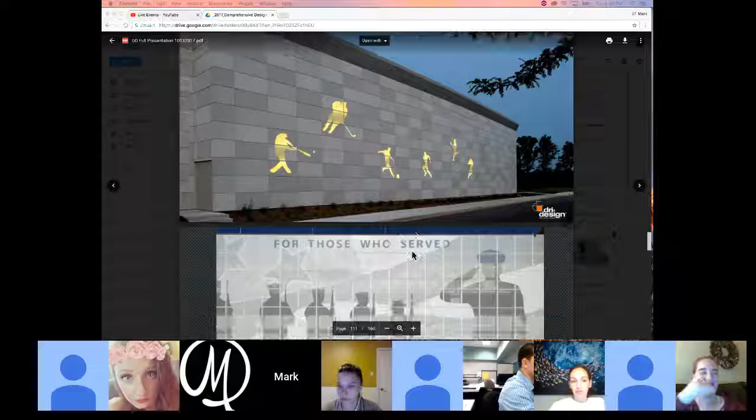All done with metal panel, all done within the sort of purview of finishes, paint, perforations, and product type for, again, a parking deck. Backlit, perforated, obviously, on a building that maybe is clunky in size and scale, like an athletic facility. This is one way of making it more palatable, or something that maybe wants to commemorate those that served. We just celebrated, of course, Veterans Day, so this is a very timely example.

Embossed, again, low relief, bas relief. So here's kind of a dimple pattern or pimple pattern, not only for interior but exterior applications. These almost look like flooring tiles or stair treads. So this is a textural example.

If you live in Oakland County, or if you ever drive through it, there's a brand new building for the Audi dealership. They've been rebranded. All of their stores look like this. If you walk up to the one in Birmingham that Bob Ziegelman was the architect for, who I just saw the other day, this is what that metal panel looks like. And here's a sort of a larger example of the Audi dealership's new appearance. And another close-up of that.

And then I won't name the Atlanta beverage company whose color is part of its brand because I'm not supposed to tell you who it is, but you know, you can actually allow the perforations to be part of the brand. And that's all I got for you. I'll just sort of show you more examples of how the metal panel has been approached with these sort of case studies.

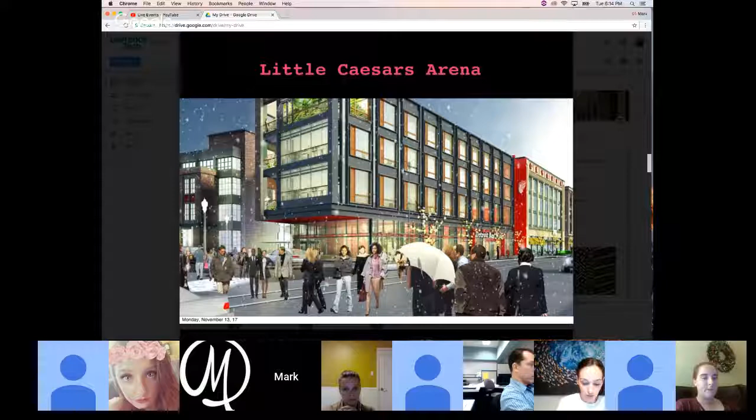Many of you know that we've worked with HOK on the arena, so these are some of our early design sketches for building A and B. Building A and B are braided together, and they sit right upon Woodward Avenue. This is where, if you've been there, Kid Rock's restaurant is, and the building to the left in this image is building C, and that is going to be a speculative office building. So these were the original Lumion renderings. This, of course, is the build out of the arena.

So the arena is this big ass building. It sits on a super block, so it takes up an entire city block, but it tries to break the building's expression into discrete vertical conditions, of which there are 11. So there are 11 different brick masonry products operating pretty coherently. Here is an example of all of that under construction. The building in the foreground is Building C. The main entrance, the Comerica entrance off of Woodward, which you're seeing on the right here, is right here. And then Building AB is this condition here.

So the shot you just saw was to the lower right of this image, and this is obviously south. And this facade is going to have other architecture next to it. This is a more impervious facade, but even that impervious facade is broken into 3 distinct conditions: the condition in the middle that reveals the wrap of the ETFE roof of the bowl, and it reveals a mass towards the street, which wraps some of the fenestration from Woodward onto Sproat Street, and then the more mechanical industrial facade to the right along Cass.

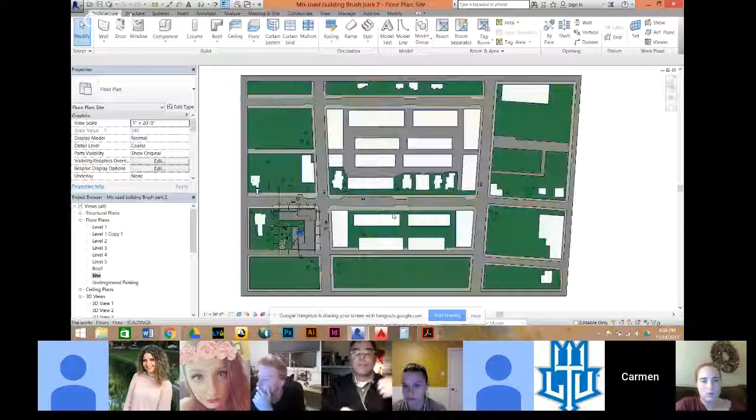That's fine, and I'm sad that you weren't able to use the effort by Michael. So maybe talk to him about that. But I think that's the way I would have approached it. Just like, oh shoot, I got to figure out another way to do it, right? That's how you have to act in an office. There's always 2 or 3 ways of doing the same thing. Do the way that's easiest and quickest for you. So that was excellent. And I'm delighted to see City Modern in the site plan. You all need to have City Modern in the site plan.

So you just answered it. Should I be putting City Modern in there, or should I be putting what's in Michael's model, the existing? Plus City Modern. Okay. All right, so I'll just keep it as it is. I think the program brief says that, actually. Okay, all right. So that was my question. I modified the underground parking.

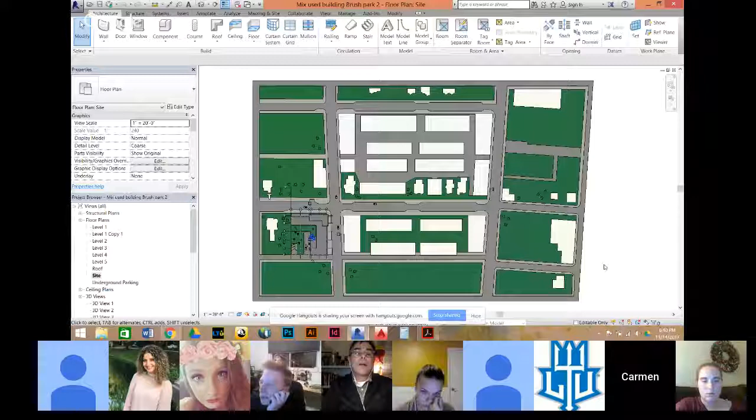Now, let's go back to the site plan. I don't know where that drawing is in its evolution. I don't know if it's finished, for example. But it is not. No. Yeah, okay. So right now, I can't tell where your site is. So you need to recalibrate the graphic sensibility so that your site is the most prominent figure. Okay.

Or element in the drawing, and everything else, including City Modern, is much quieter, right? It's like a figure ground drawing right now. So City Modern as a development is no different than the existing houses and apartment buildings next to you. So maybe look at examples of site plans online in the Blackboard folder. Look at how existing and proposed conditions were illustrated.

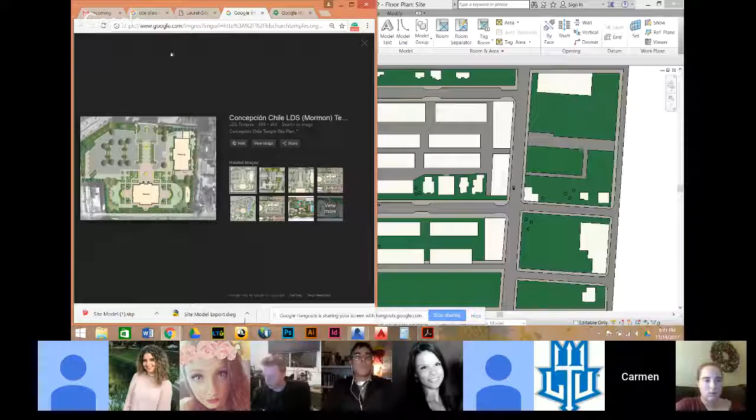I found a couple that I liked. For example, this was one. This would really be my goal, to have it like something like this or like that. Yep, I agree. I have a lot of work to do. Like something like that where it says the City Modern, A5, A3, and then the streets. So it's just a little bit. You don't have to label the building names of City Modern unless you're labeling everything on the site plan.

Basically, I think the premise of this studio is it says Hamilton Anderson was not hired. You've designed Carmen, but everything else and everyone else that designed City Modern did their work, and it sits exactly where you showed it. Okay. All right.

I also wanted to show you the underground parking. So I added my second set of stairs, rearranged the entire lower level, moved over the underground ramp. Your speed ramp changed. Yeah. So now I can fit 46 down below. Okay, so this is good. Let me just stop you right now at column line F, right? So you don't have a space there.

So you're going to want to protect that column with paint, right? Or a guardrail. You know what I'm saying? So you need to figure out a way to protect that thing, because it's the only one I think that's out in the middle of nowhere. Can you zoom in on that area? I want to look at space 12. I think space 12 can be a perpendicular space, not an angled space.

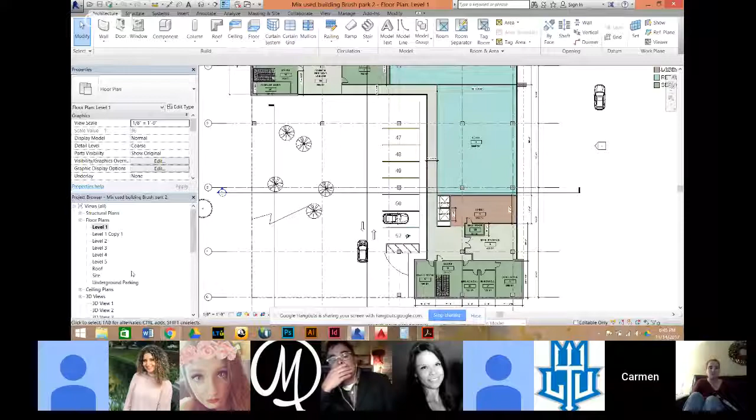So go back to the ground floor and zoom out so I can see the column bubbles. Back to the ground floor. Yeah, so you may have to rework that parking. And if you only need 4, you could maybe introduce them off the alley. Okay, off the alley. Perfect.

Now, let's go back downstairs for a second, to the basement floor. This is the basement. So that speed ramp is going to rise vertically as it moves towards the alley, right? So part of that ramp sits on the ground. As it runs vertically, it starts to create headroom underneath it so that you can actually drive under it, right? So there's going to be a moment when,

first of all, you want to show the dashed line work of the ramp moving up overhead. Anything in a floor plan that has dashed lines is indicating overhead ceiling conditions. So you're going to want to recognize that with respect to the ramp. Also, the squiggly line is what I'm talking about now in that area. So there's going to be kind of a square bulkhead that the speed ramp sits on. You should indicate that and then show, I should just draw this for you, but

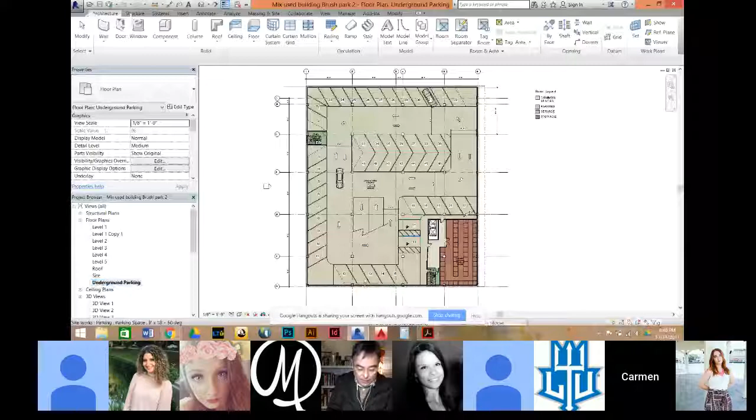And that parking space I'm talking about, go back to your ground floor plan, your basement plan. Screen share your basement plan. Yeah, you've got this. What I'm saying is do this. Right next to. There you go. And then you've got the column here.

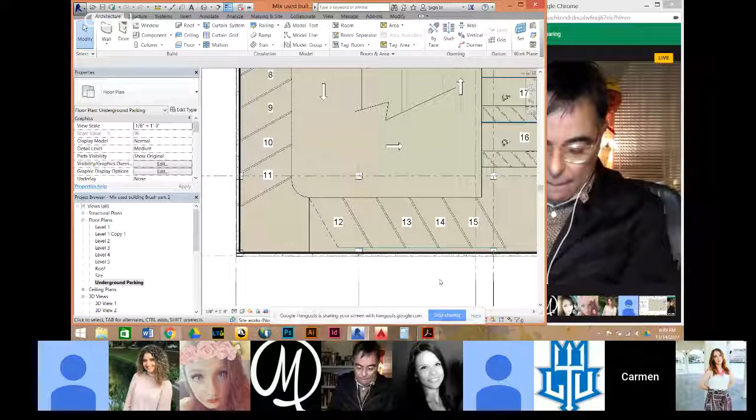It's kind of sloppy, I apologize. It's got a couple of things going on in it. But do this. There's your column. I see. Okay. Got it. And that's the curb or the paint stripe, Carmen, that protects the column. Okay. All right? Yep. Bueno. What else?

I think your presentation was perfect with what I needed for today. I printed out just a couple images of materials. Oh, that's nice. Can you hold that still for a second? Yeah. It was a little bit more traditional. That's a beautiful building. Where is that, New York? I'd have to go back and double check. I just kind of copied and pasted.

Then there was this type of material right there. Uh-huh. It was all metal. So I was just taking a look at windows. I'm gonna finalize by Tuesday, the windows with the metal. Yeah, that's a nice building. I know that building. So I think they were very sophisticated with the colors that they use, plus the metal. I like the window dimensions. So that's what I'm pulling together. The presentation was very helpful with the colors, the redesign, all of those. So I want to see what I can do with it.

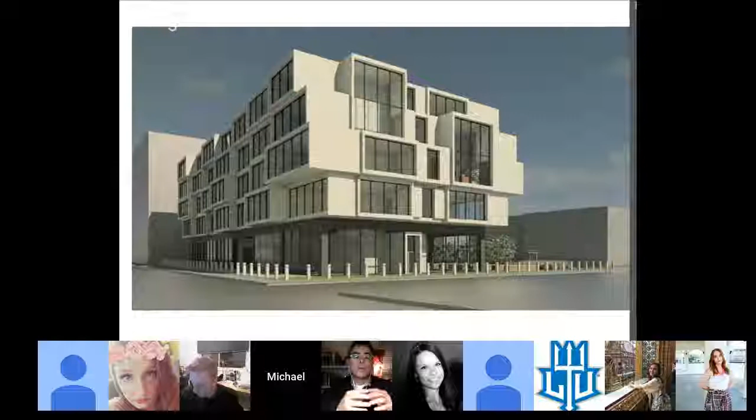Oh, you have like 2 computers up. How do you do that? I just opened the link on my personal laptop. Ah, brilliant.

So I fixed up the facade a lot. This entire part facing Alfred, I added windows. I also added these 2-story bay areas. I love those. Yeah, so a few of the apartments now are going to be 2-story lofts. So they'll be smaller in footprint, but there will be a footprint on 2 floors.

I think the window units are... I don't think there's enough mullions. Boy, okay. In all of them. So in like the second floor. Well, let me be very careful to say this because I love the amount of transparency in that unit. I want to make sure you understand that, right? So I love the quantity of area.

I don't mind the number of vertical mullions, but I think you're going to need horizontal mullions like 2 feet up from the slab to do 2 things, Michael. One, to break that vertical height of glass into something more reasonable, right? From an installation and from a cost perspective. Not that cost is a driver, but more importantly, from the perspective of the necessity to provide fresh air into these units by virtue of kind of an operable awning window, right? That you can crank open.

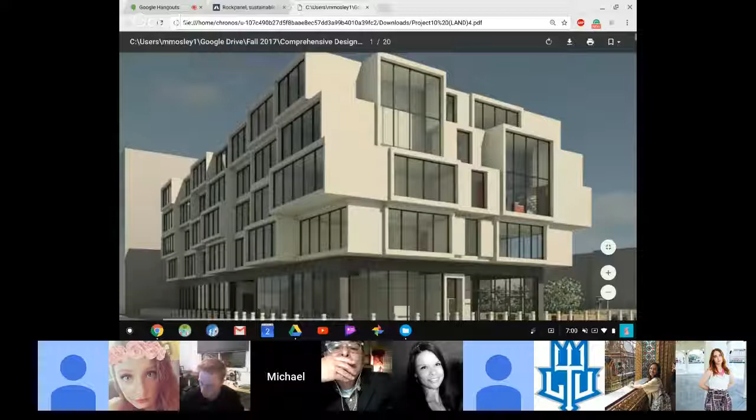I was looking at a few materials. This is Rockpanel, which is very similar to what you designed, or presented. Yeah. But made out of rock. So something like this or your metal cladding could work on the outside. And then I could choose a white and black one if I wanted, or just something to differentiate.

So if this building is actually a panelized thing, like a cementitious panel, a metal panel, or whatever, then there's a whole other conversation, right, about jointing. If it's poured in place concrete, then there's only joints that are relative to the concrete. So that's something you want to talk to Ash about. But there is something kind of compelling about the sense of mass and weight that the all white gives you.

So if you go with a panel system like fiber cement or metal panel, I would suggest that you try to create an effect with very few joints or minimal joints in terms of width and height, so that you create a more uniform aesthetic. Because there's something really powerful about this thing as a thing that's all white or is all black.

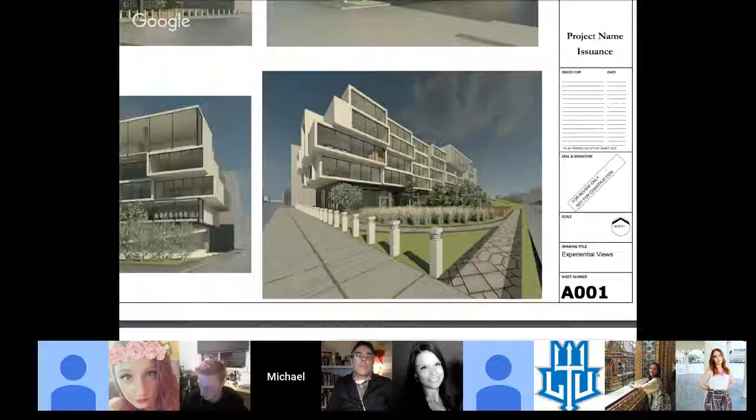Yeah, so the park layout isn't finalized by any means. It's something I just started working on, but it definitely helps to see what's in it. A lot of trees. The ramp here, I extended it all the way up, go to the site plan. So it can be like a green roof going up here. Shadows are messed up, but

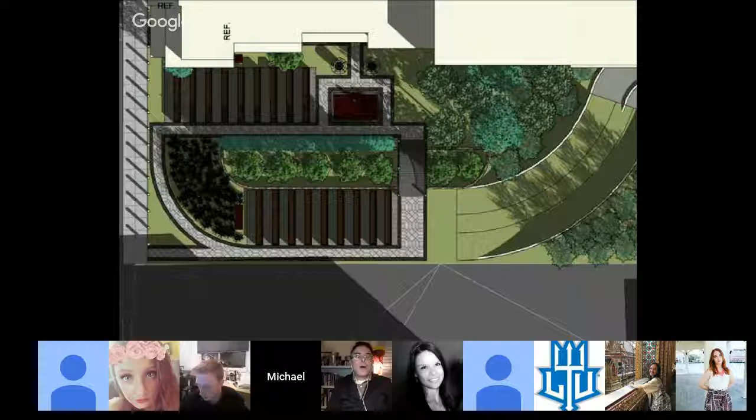here in this area and this area are just planters. I thought those could be operated or owned by the residents. This right here, it's just a Zen garden. It's peaceful, but I also had way too big of a footprint for the retail space.

Let's go there. So what I did, yeah, it keeps lagging. Yeah, I noticed that. Zoom out and then maybe zoom in. Can you just pan? Let me try and reopen it. Right here, well, this shows it. So since those two retail spaces were so big, right, I'm still not seeing it. I still have your logo. Oh. Did you screen share it? And I'm gonna rejoin. There we go. Oh, just went away.

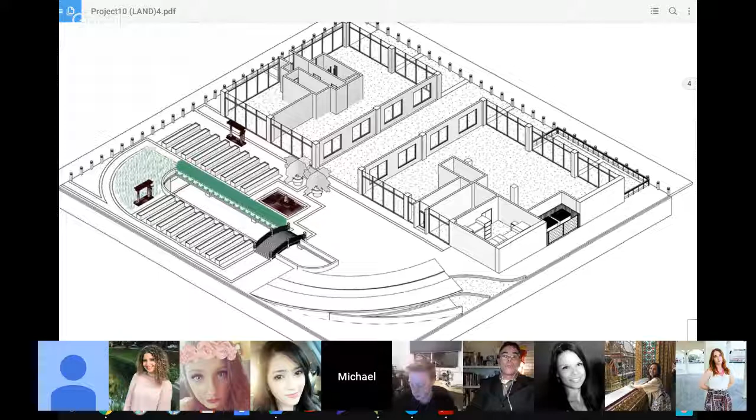These windows that I just put in here could be replaced with like a rolling glass panel. And so say if this wasn't a regular retail, say if it did end up being like a community harvest type thing, or even just an event space, it can open up into this. And so it gains a larger footprint. And then one of these could be like a NanaWall or something, and then you get all of that exterior.

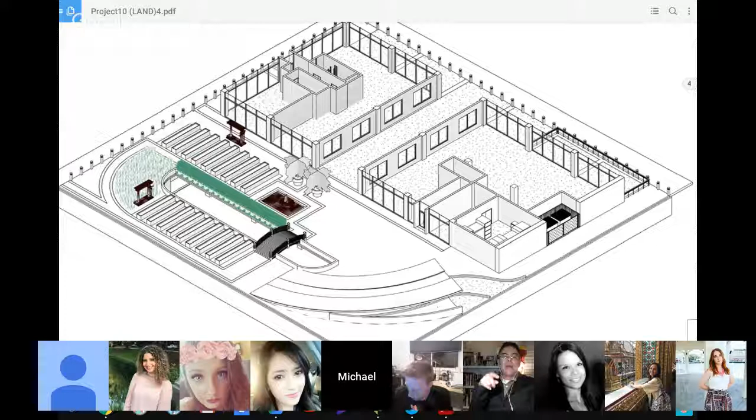In the area, Michael, where you've got that little Chinese bridge, that footbridge, is that spanning over an opening that looks into the parking level below? Yes. Okay, so like in the conversation I had with Carmen a minute ago, where you show on the plan items above that are relevant, like overhead conditions, as dashed line work, you're going to want to show that incision and the bridge as dashed line work on that parking plan. Okay. Capiche? Yeah, this was my plan for it.

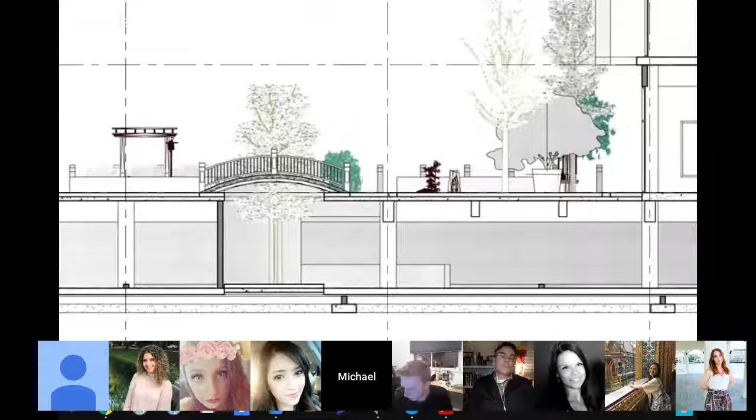Yeah, there's a lot of graphical standards that my drawings, especially these sections, need to be bumped up to. So here's what I want to say about that. Based on the way you're trending in our studio, the progress I've seen tonight, and the quality of the decisions you're making that are leading to the design you have for us tonight, if you continue to press the way you have been, you're going to make it. Cool. It's good to hear.

But you haven't had the section and the conversation with Ash completely resolved yet, so I'm freaking out. I'm freaking out because you're getting closer to nailing this thing, and I want you to nail this thing. But if you don't work out that wall section, it's going to be a huge hit on all of the hard work you've been exerting. And I'm noticing this since Benchmark 2. I'm wildly excited about how far you've come, but I'm still freaking out. I'm just trying to be honest and encouraging. Is that translating? Yeah, completely.

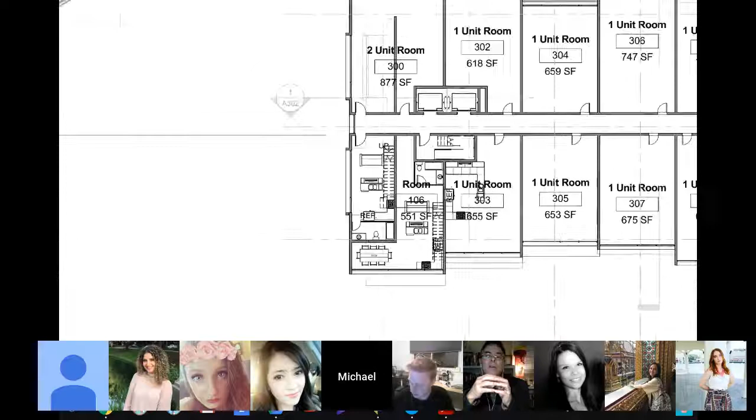That was most of the big changes. I did do one little layout here for the rooms. Yeah, let's look at those because I haven't seen them smart sized yet. So what's this interlocking L thing? Is this all kitchen? That kitchen's big. Oh, that was just the kitchen family I was working off of. You need like a sleeping room, a bathroom, and a kitchen. These two are 650 units, the only ones I've been working on, and these are the smaller lofts, so everything's a lot more open. The kitchen is right there.

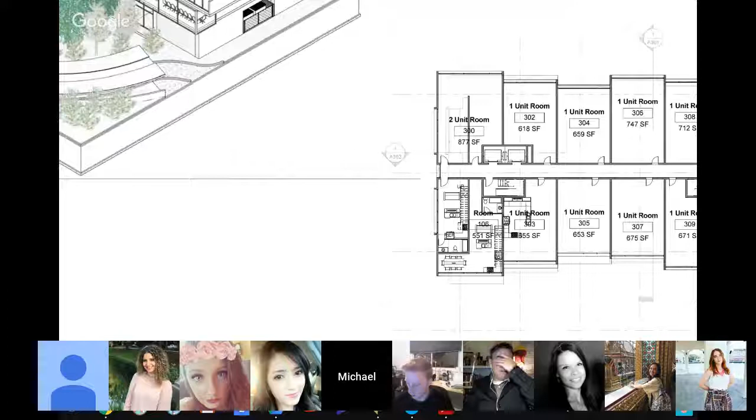So in the 551, where am I sleeping? You go up these stairs, because this is the 2-story, and then your bed's right there. Never mind, let's go back downstairs. Can I look at a 600 square foot unit and your idea for that? I have not worked out any of those units yet. Okay, a lot of your classmates, if you go into their folders, have looked at this, and you could learn a lot about how straightforward they are. While they are fun to work out, they have to be worked out, right? Can you go back to your plan there for a second?

Like 304 is not the same thing as 306. Right. Not the same thing as 308. Each one is different. So try maybe to think of, remember the Cleveland project that I showed you with Stanley Saitowitz with Natoma Architects, right? So they color coded like a green swath, a ribbon along the corridor wall that graphically kind of indicated the infrastructure for each unit.

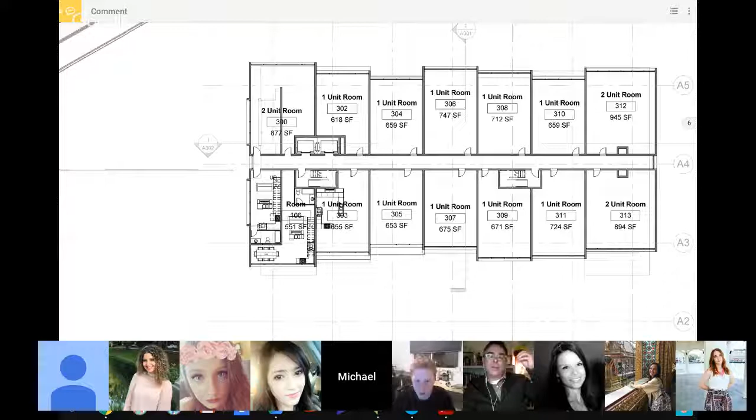You know, bathrooms, kitchens, closets, that kind of stuff. What was not colored green was like bedrooms and living rooms. So think of organizing that stuff in these small units in a rigorous, simple way. So let that be the constant that works on all of these units, and then let the variable be the sleeping room / living room.

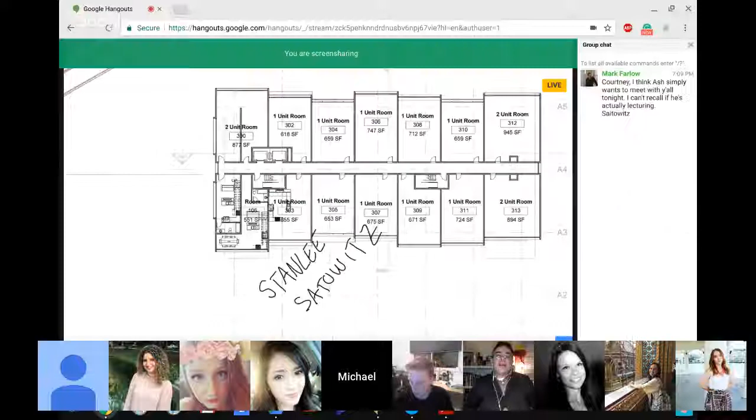Yeah, so it's the, yep. Go to images. Oh yeah, there's this one. Remember this one? Yeah. So click on this project and get into the drawings, or scroll down. Maybe there's an ArchDaily. I showed you all these drawings. It was in ArchDaily. I know that because I grabbed those images. Keep going.

That drawing. This one. See that? Services, kitchen, storage. Those are your units. Okay. Right? So green indicates services, right? And then the variables, like look at the variables, right? Living room, bedroom. Good stuff. But the same rigor that he went through is what you have to go through.

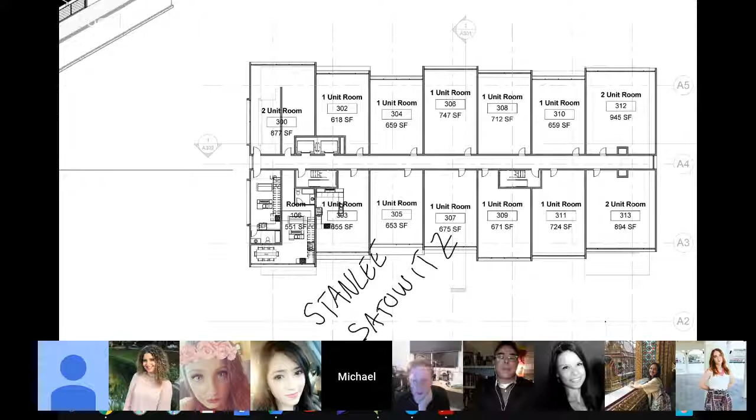I think Tracy and I are going to go there over the Christmas break because I want to see this bad. Yeah. And I want to have my own experiences of it for the next time I talk about it. Can we move on? Yeah. Cool. Keep going, Michael. You're almost there. Thanks. This was informative. Thanks.

Okay, let's see. Eric. Do I still have Eric here? Eric, are you there? Yeah, I'm here. Do we have anything to freak out about? Nope. I think I'm in good shape. I would too.

I do think that for your project, the thing I'd like to see you really explore is the skin of the building and the way that you approach that. I'm not necessarily talking about doing the large elevation drawing, but maybe the lecture tonight looking at metal panel, maybe looking at brick, will help you think of it not as just one consistent skin that's wrapping around it, but maybe breaking it into more discrete moments. I don't know if that's going to work for you, but I think it's worth looking at.

And I'm trying to encourage you to do that, and then I can look at that with you. But you got to want to do that. I'm not telling you to do it, but if you do it, I'll look at it. Okay. Yeah, I'm actually getting to the point where I'm going to start tackling that pretty soon. So maybe even by the end of the night, I'll have something. I can shoot you an email on it. You know, I'll look at it.

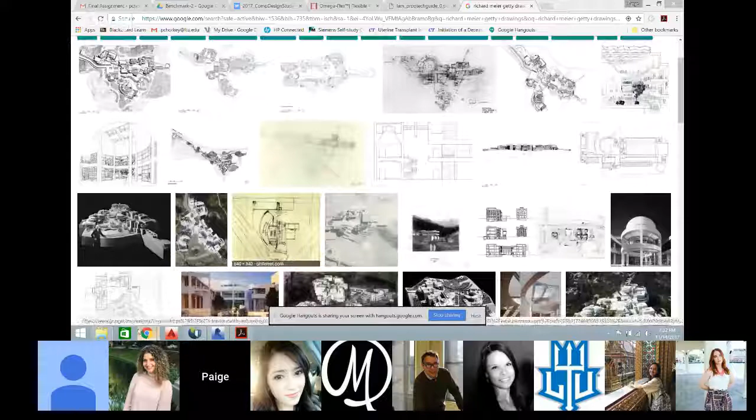Okay, go to the top row. This one? And look at the elevation sketches. Third one from the right. Yep, this one. Look at those drawings. Actually, that's the Frankfurt Museum. That is the Kunsthandwerk Museum in Frankfurt, Germany. Right? Yeah, it is. Although it says Getty, but this is Frankfurt. Yeah.

But scroll down, let's look at some more. Okay, the second image. Go back up. This one? That second image with the pool. Let's go to that and then go to the article. Let's go to the visit. Okay, let's scroll down. These archdaily.com articles generally load up the project with drawings and things like that. Close. Scroll down.

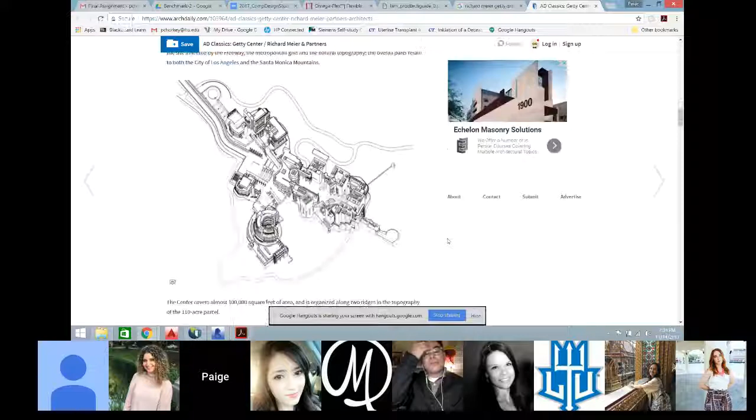There's an image. Materials. Yeah. Look at the materials, just like what we were talking about tonight. Oh. Mm-hmm. I'm not so interested in the interiors. Okay, click on that. This one? Yep. So, these are amazing, right? This is not as big as your building, obviously. Why does it keep popping up? I don't know.

So here's the thing. I want you to take a little bit longer look at Richard Meier tonight, and look at his work, look at his drawings, look at his elevations, and begin to ask yourself, why did I bring his name up for your project tonight? And I think if you kind of think about it, it's going to be pretty easy to understand why.

The gridded pattern on the metal panel that you're going with here is comparable to his square grid pattern. The window proportions and the window heights and the window varieties that you've got are comparable to what he's got. The idea of incised balconies, of colonnades and pergolas on the roof, the complex massing, right, is part of not only his vocabulary, Paige, but also...

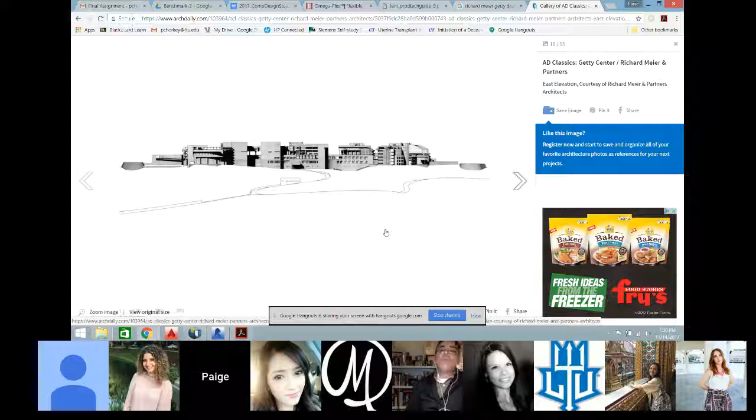This is 1927. So Paige, all of these guys, Richard Meier, Charles Gwathmey, Michael Graves, Peter Eisenman, even John Hejduk, along with a whole bunch of other people after them, looked at this guy really, really carefully. They tore it apart and tried to make their own work better than him. He was kind of like a god to them. And they tried to kill him, in an Oedipal way, right? Kill the father to be the better father. So they tried to best him at his own game.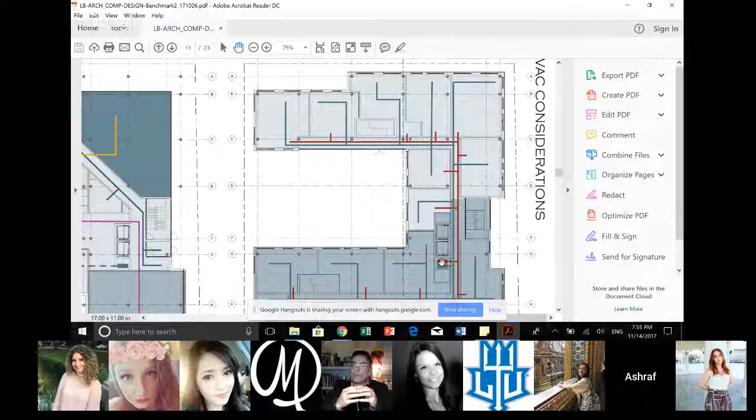She does have the return and the supply right here. That's the supply, and the return is the shorter one. This is a very good foundation, and she did have the return duct and the supply duct. I would expect that she and others as well start laying the supply grills in her rooms, and start to find the shortest path for this duct.

For example, Lynn, are you here? Yes, I'm here. Okay, thank you.

Usually the duct here has to have like a dead end. This way, with this supply duct, most of the air will go in this route. It will not bend to this path here. Why? Because aerodynamics 101, the air will find the shortest path or the easiest path. And to make a turn of 90 degrees is very hard for the air. So the air is going to just go all into this unit.

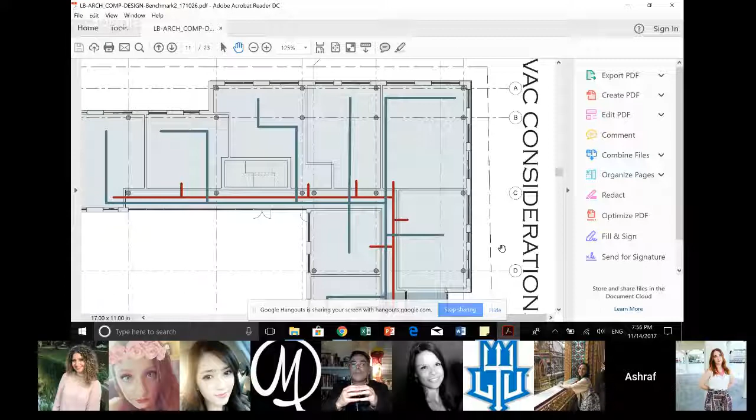So you have to have a sort of dead end here, and then this duct comes with a sort of bend to enter this unit. Another thing here, these share the same line. These should be a little bit staggered. They don't line up this way. So that's a quick comment, but it doesn't negate the very good job that you have done.

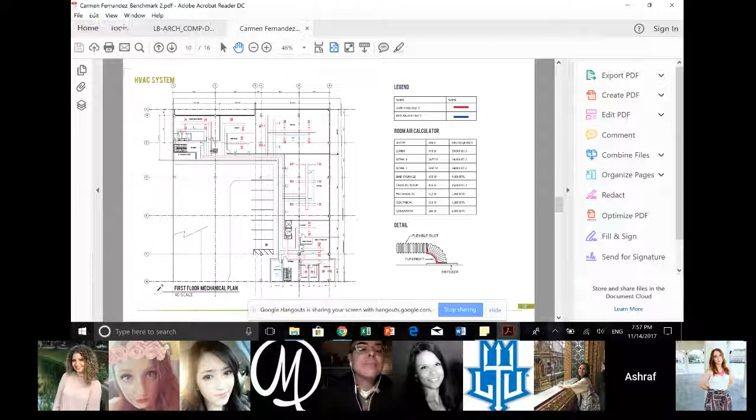I'll show you Carmen's. She has gone the extra mile in this benchmark, and I want everybody to start thinking her way and trying to finalize this floor plan. Here's Carmen. This is more advanced. I'm not saying it's perfect, but at least she started to lay out her supply and return grills. It could have been better, but at least she lined them up straight, meaning that her grid system in the ceiling is well thought of.

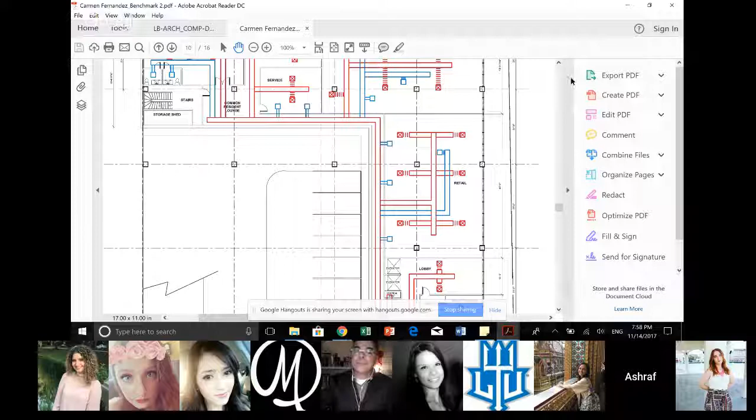I would love to see a grid for the ceiling. This is how the mechanical engineer and electrical engineer guys start these things. I didn't want to increase the deliverables, but usually they start with a reflected ceiling by the architect to lay out the supply and return grills. In this space, this is not bad. The exercise room and all the other entrances.

They start to look at the reflected ceiling plan and start from there. Try to connect these dots together, looking at the reflected ceiling. This is their start point to execute your dreams. You are the boss, like Mark at Hamilton Anderson. You are the boss. You lead these people to do what's in your mind, what your dreams are.

By the way, Carmen, are you here? Carmen? I can't see anybody. I'm just concentrating on this one.

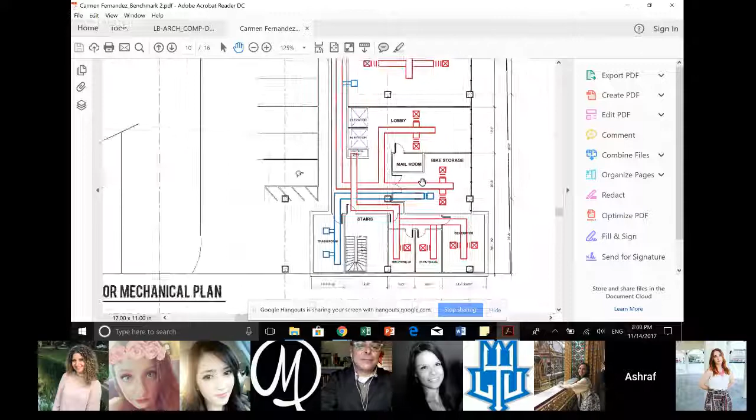This has a very bad relationship with the columns. These quirks will be fixed in the final. So again, that's a very simple supply return floor plan, and I'm really proud of this work. Again, it needs some refinement. I can't reveal more than that in front of others, but this is close to what I mean by a mechanical floor plan. So that's regarding the mechanical.

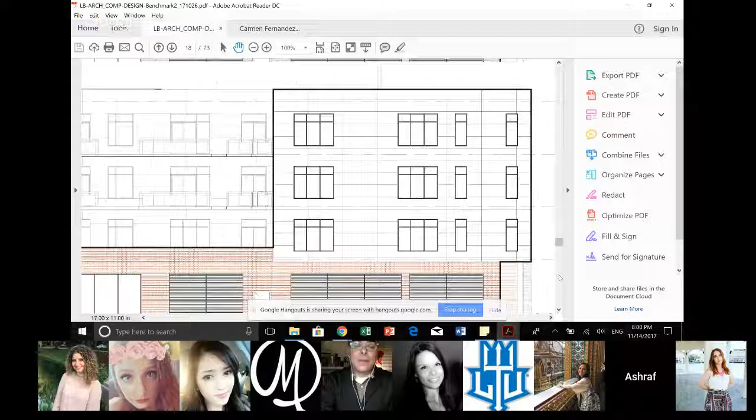Enclosure, this is why I brought Lynn's here. Enclosure, this is what I'm expecting. I'll show you other examples very quick, just a second here to finalize Lynn's. Where is the, I'm sorry. I'm looking for the wall sections here.

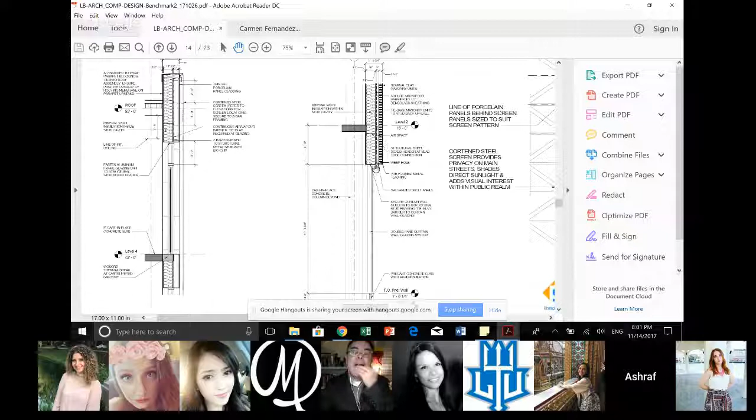Here. These are, again, good for this step. Very, very good. Very annotated, very precise, line weighted, leveled wall section. Let me see here what I'm looking for. The relationship, yes, she did it here. The relationship, how her skin is tied with the structural elements here. How your muscles are connected to your bones.

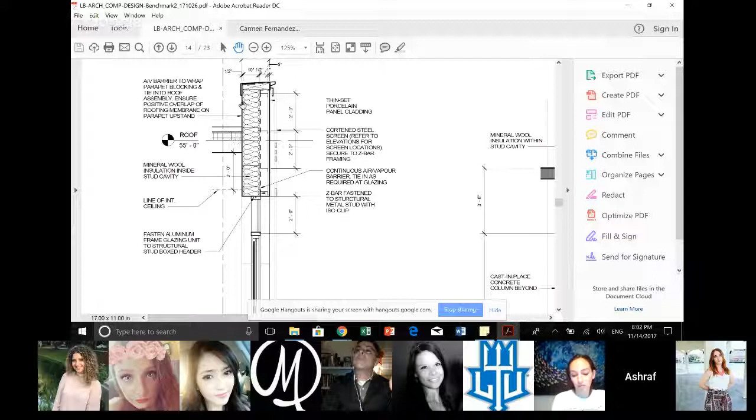Okay, so she does have a header at slab. It's not very clear here, but I would love to clarify it more. Otherwise, this section is good, apart from the thickness of the stud, which is 10 inches. That's a very big stud, very heavy, very hard to hold. This heavyweight porcelain on, regardless if you had changed or not. But I would recommend you guys to go with the 6 inch stud. That's the norm in this case.

So this is what I'm expecting. Very nicely done wall sections like this. I'm gonna show you another example, which is very good from the people that submitted this. This is Ed. He's doing CLT. Okay, so that's his. He's kind of a little bit crazy. So he did like a Vierendeel truss. They have different projects, very heavy, more complicated.

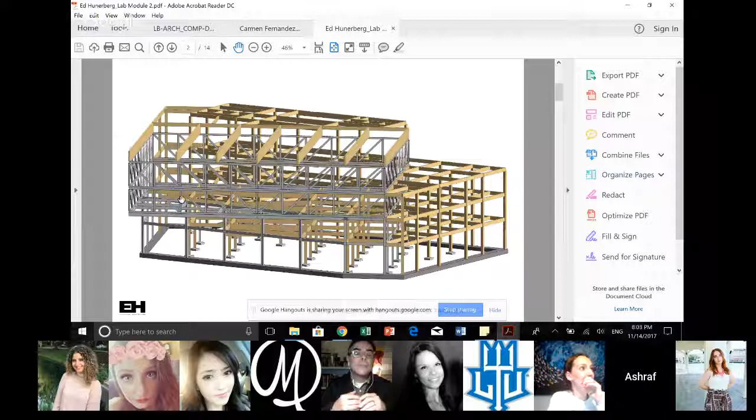So he does have like a structural truss on the top of his building. This is another shot, and he's mixing between steel in this rotated mass here and CLT with glulam wood. He started doing his structural floor plan and sort of keyed it in. So this belongs to the first floor, second floor. This is the foundation, probably the first one. Second floor here, third floor with some nice skin on the side for the enclosure that he wants to go with. And the last floor, which is his Vierendeel truss.

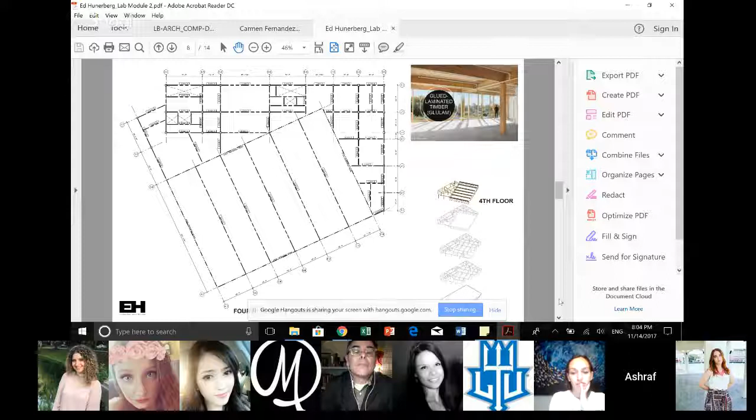This is his HVAC. We had a lot of discussion last time regarding the zoning. It looks sexy, okay, but it's not completely correct, because as long as you show the zoning down here, you have to show me how the zoning is reflected on each of these ducts. So there should be some split here, and he does have some problems with this duct coming from up with this rotated mass here. So he will solve this, but that's again beyond benchmark 2.

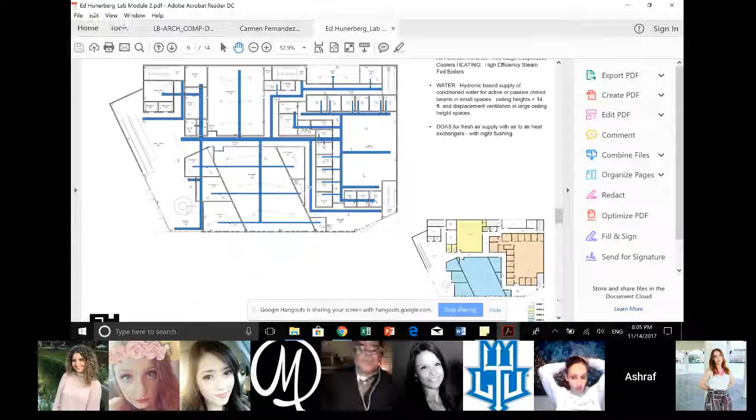And again, I love that he keyed it in. He keyed the zoning of each floor on the side. And that's the following floor. Again, very nicely done. This is this zone, coming from this shaft, and this is this zone. This should connect to the one down here. Okay, so there should be another split here, and this is the third zone that ends here. So there must be some separation here between this duct and this duct, which should feed the one below. It's just very minor comments, but I love the illustration, easy to navigate, easy to follow. This is his last floor, which has no problem.

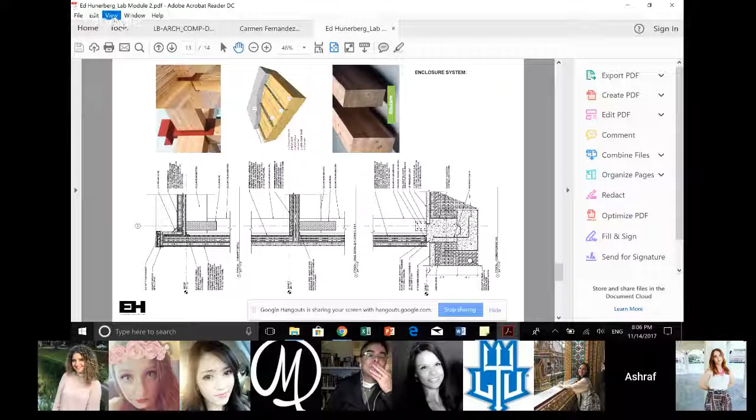This duct is coming from here all the way till here, this is its end. That's a very long one. Okay. This is much better. This is the one that I wanted to bring. Very nicely done. Wall sections annotated. Again, it's not Bibles. Okay, it's not 100% correct.

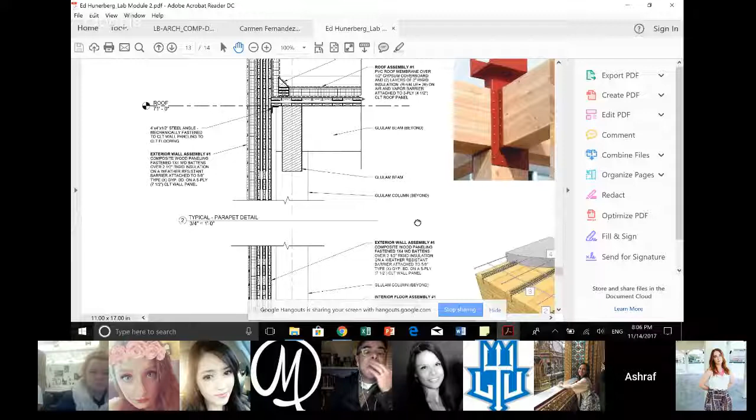This continuous insulation needs to continue, not to be interrupted by this. Even with the cant strip, he can have a little bit of a header down the cant strip, and it still goes above the insulation. It's fine with a little bit of an indentation. Oh, he did use 1/2-inch gypsum cover board. Again, this is the level of detail that I'm looking at. And he did a roof parapet, mid floor to the skin. That's the law of the land, okay.

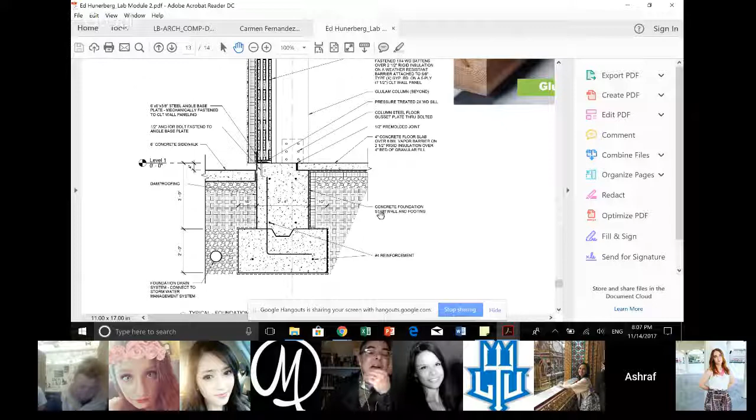And then he did a foundation section, which is very nicely well thought out to drain any condensation. He doesn't have a clear drainage path behind it, but I have to look at the system he provided the photo for in a previous slide, the one on the right. But that's a very nice wall section, annotated, very detailed, line weighted, hatched, very nice. I'm not going to comment on the reinforcement. That's a little bit off, but it's not a pure structure class here. Very nice to show the flooring with these shear meshes and light reinforcement.

What I have said to him is that 4 inches of concrete topping is heavy for this kind of structure, and they do use some sort of lightweight concrete, like the grout or mortar that goes under the ceramic tiles you probably all have in your bathrooms. It doesn't have a lot of water content, and we're exploring a moisture barrier here above the wood or the CLT to prevent excessive water absorption by the wood. Otherwise, it's wood. If it gets water, it expands and changes dimensions, and that's not good for wood. So again, he used you as an example.

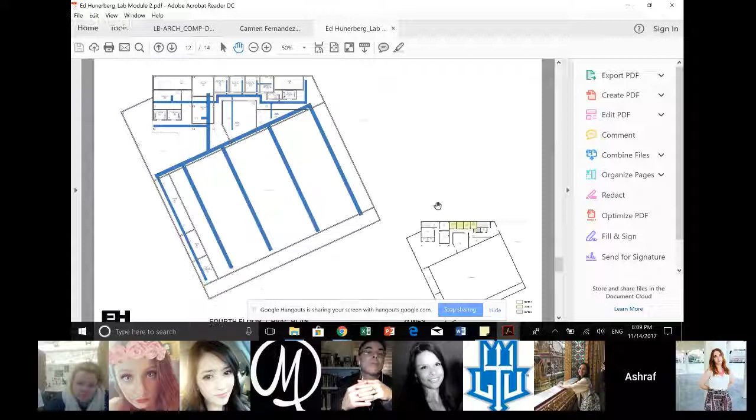He did Excel, and I wanted again to show you this, to show you his examples, so that you can excel. It's a share of knowledge, share of information, but I'm trying to bring you guys my expectations. I love to close the gap of expectations here, so you both benefit. This is his system. We haven't discussed this yet, his skin system. So to close this gap of expectations, so at the end, I myself and Mark are proud of you, and you guys are proud of what you did. So that's Ed, Carmen, and Lynn.

One last thing, I'm gonna stop sharing here, is the integration. The integration. What do I mean by that? If you had done this, which I believe most of you have done in Revit, I would love that you guys look at your plenum, your reflected ceilings, and if you had built these correctly in 3D, I mean structure, your beams are sized right.

I would expect that because simply you provided me with these nice 3D models for the structure that I will never forget. Eric's with his shades, Nancy, forgive me if I forget somebody, okay? Lynn, and who else did the 3D? Forgive me again, Carmen. Yeah, Carmen did one. Forgive me if I forget any name.

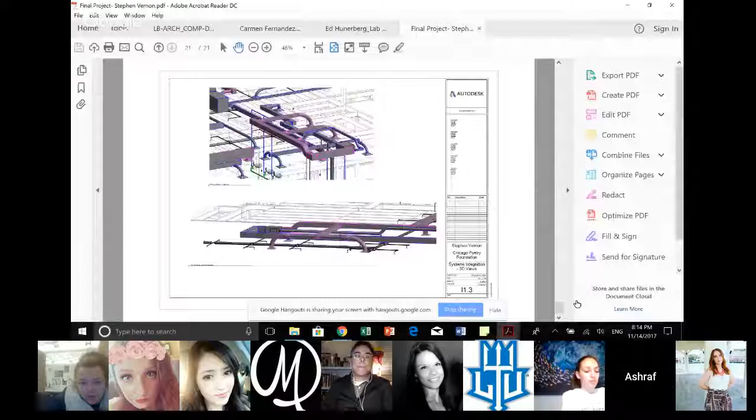So he did exactly structure, mechanical, and this is his mechanical floor. Let me zoom a little bit. It just makes my life hard because I cannot flip the page easily. So this is the integration part. He laid out his mechanical floor plan, which again is not perfect. I'm not 100% happy. This is his VAV box. These VAV boxes control his zoning. Obviously here that's 4 zones. I don't know what he did here, but anyway, I can't remember.

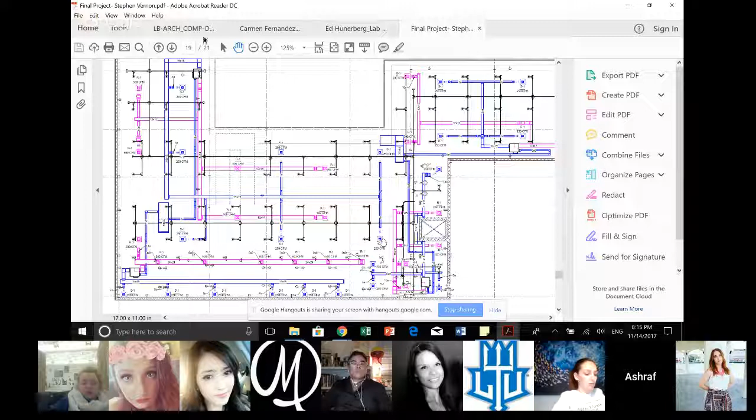That's from last year. So what he did here is he started laying out his sprinkler system, as you see. The dark one and the bluish lines are the HVAC. So this is basically how this goes against the structure. We don't have fire suppression systems here, but we do have the mechanical and the structure. And what he did in 3D is look at those components and how they intersect together.

So obviously he does have, let me close here, he does have a problem here. I don't know if this fire suppression pipe is going right into his HVAC duct here, or I'm imagining. I think it's below the duct. Yeah, it's below. Okay, he wins. And of course these are some of his supply grilles here, and he did use the flexible ducts.

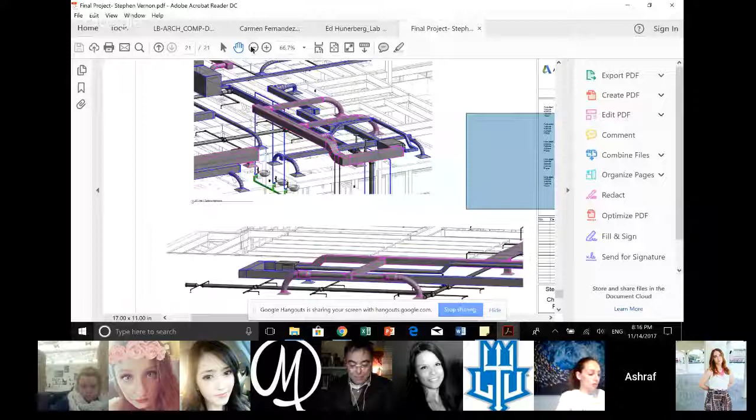I'm taking off my glasses here to see. He did plumbing as well, as you see here. That's his toilets. Sorry, I don't know how to. Oops. Oh my God, what's going on here? That's another part. So this goes against his beams.

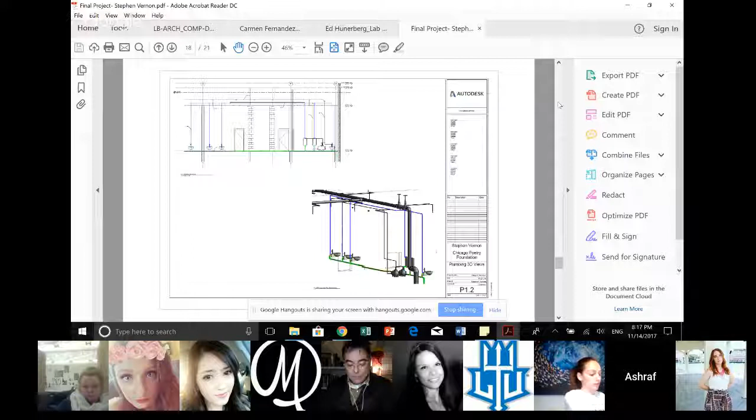Let me focus here one more time. It does not, okay. This is another shot, another 3D shot. They were required to do this in BIM for building systems. That's his VAV box, which is wrongly placed. But again, you get the idea of the intersection between your building systems. Whether you have done it wrong or right, if you have the chance to provide a visualization like this, I would love to see the integration between your systems. That's his plumbing.

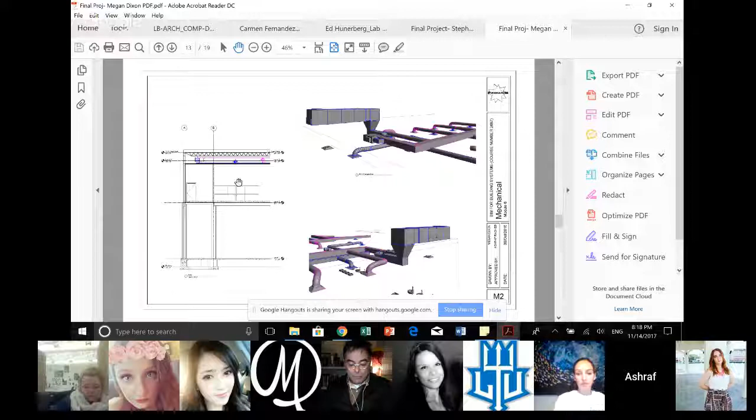I'll show you another example, hopefully, in here. Where's Megan? So they did the 3D, and that's her mechanical, much better. No, Steve had done it better. Okay, so she did provide some 3D for her mechanical, but of course she did provide a section here about how her duct is going.

Again, not perfect. Some of them are architectural engineering, by the way. So they are good in this. For example, this is her air handler unit, and it should be a little bit up. It shouldn't be at the same level. But again, they're still students, and they're trying their best. Her distribution here is slightly better than the previous example. But Steve had done a much better job in showing the intersections, how the structure and the mechanical go together.

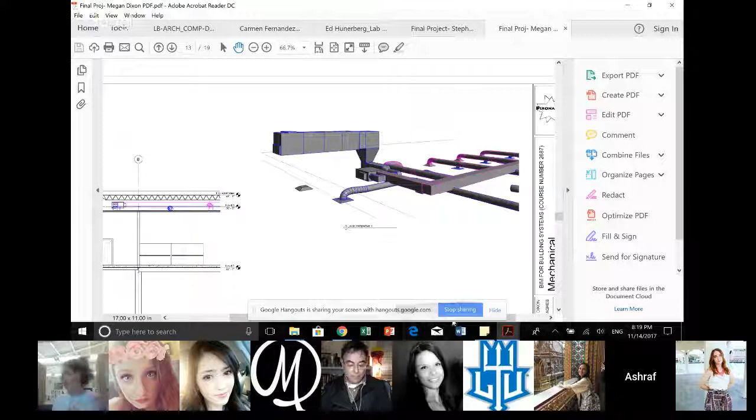So that's the integration. I'm just showing it to you for sharing knowledge and trying to enhance the deliverables of this class. So if you had built this in Revit correctly, you will be able to take a shot or two of the integration between your structure and mechanical, at least, and enclosure. So that's my talk of tonight, about the integration and expectations, more refinement of your systems.

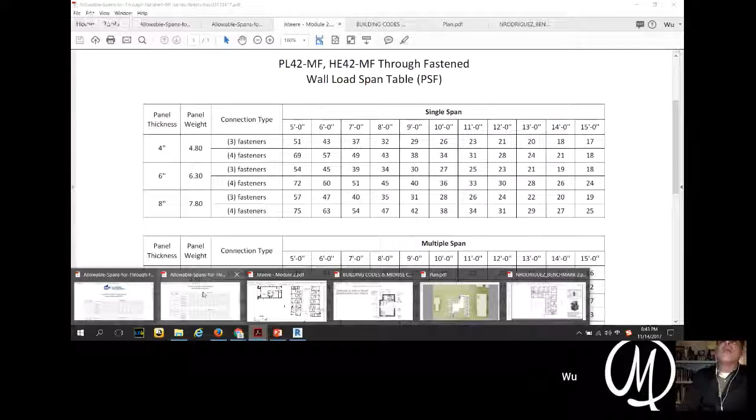Let me ask you to screen share a different thing. Can you screen share the drawing sheet that I shared with you? What sheet? Sure. Comp Design Studio. Module 1 research. I think under building codes. I have this over here. No, maybe not. Which part? I gave you the code study for our building. Oh, okay.

It's called Brush Park Mark Farlow, and go to code analysis. It's one drawing. No, not this. Maybe it's in another folder. It's in Brush Park. Code analysis. Right. There it is. And go down to total occupant load and occupant load per story, table 1.

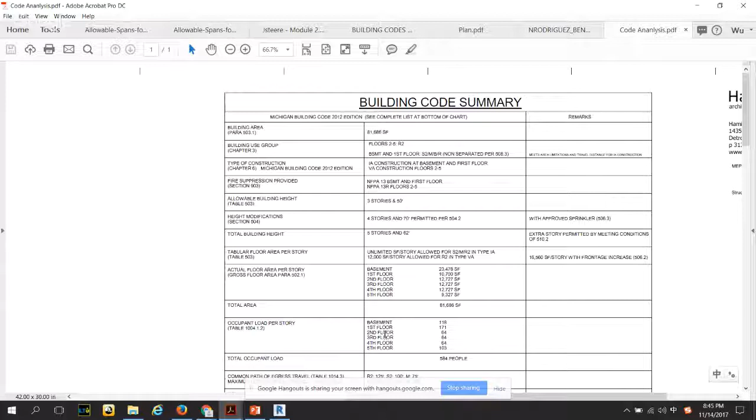So in my building for this particular site, this sheet, by the way, Wu, is a sheet from our job for this project, right? So this occupant load, basement, first floor, second floor, and so on, gives you an occupant load of about 64 occupants per floor. And on the top floor, we have a community amenity space, which has an additional 39 or 40. That's why it has 103. But here's the point. If we had 64 occupants per floor and divided it by, say, 15 units per floor,

I don't remember how many units per floor we have, but 64 divided by 16, looks like we have 16 units per floor. So there's an occupant load calculation that anticipates about 4 occupants per apartment. So there's got to be language in your research sheets that stipulates that. It's based on R2 and on code section table 1004.1.2. I would go back to that to double check. Yeah, sure.

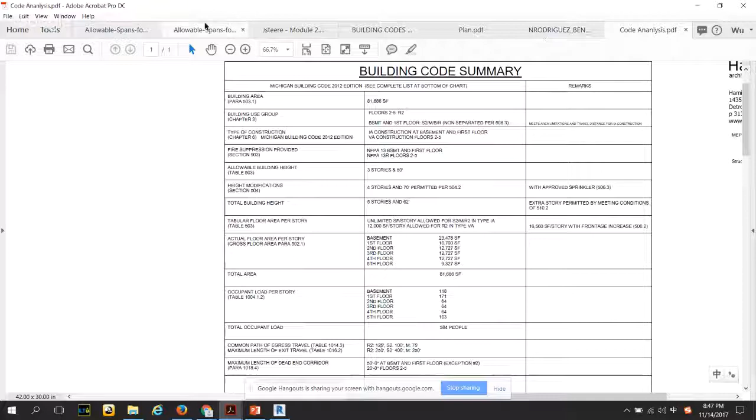But Wu, 64 occupants per floor, distributed over 2 stairways, that's 32 occupants per stairway, right? That's really, really low. So this is a really easy drawing to do. Did you look at Eric's or Josh's or Lynn's occupant load sheet? Yeah, I'm in Joshua's file right now. Those egress life safety plans that he did were really good. So were Lynn's, near the end.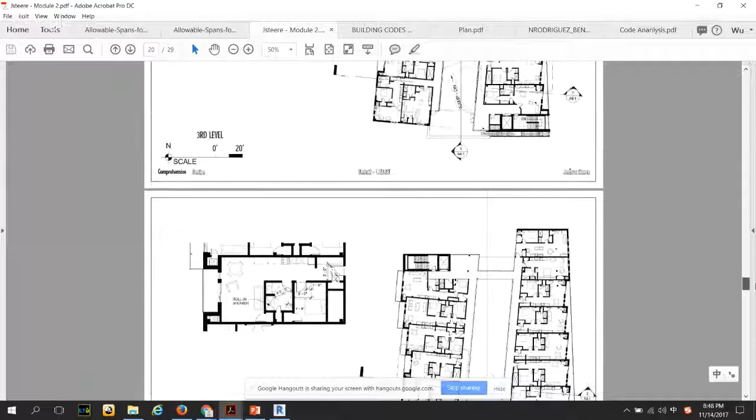Keep going. Oh, here. Occupant load 49. Yeah. That's the occupant load for the amenity space. Remember, that was part of the original program, because if you keep it at 49, you only need 1 exit, right? Oh, okay. Right. That's why I did it that way, to make it easier for you. You're welcome, by the way. Right. The building code is very... But look at his occupant load sheet.

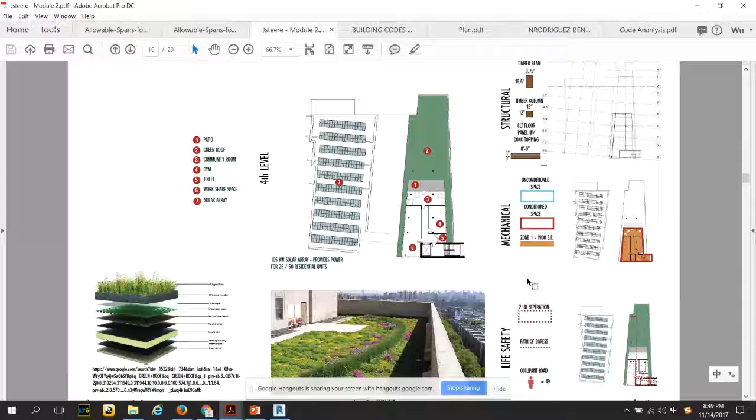Look at his egress and life safety sheet. Keep scrolling. Scroll down. There it is. Yeah, that's it right there. Nope. Where you were? It's 12. I have to go. It's a floor plan. Floor plan, I guess, is these. No, you just had it. You have to scroll back down. Keep going.

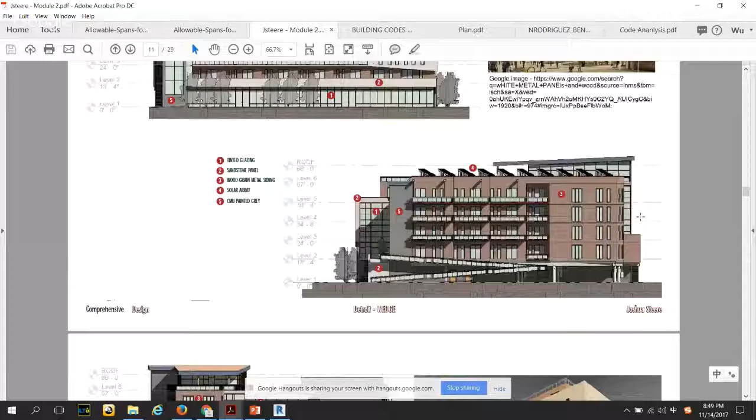That's the enclosure. Did you freeze there? Really? Can you keep scrolling down? Which page you're in? I don't know. You need to keep scrolling down. I don't know which page it is. I'm not looking at it. I think the internet is very slow. Yeah, I already passed it, but oh.

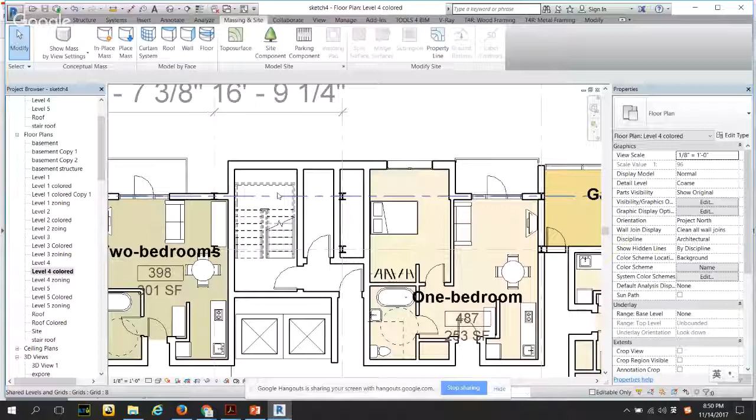Yeah. So these drawings are showing that stuff. Yes. Like here. You see how he did it? See, he's got the occupant load calculation where your cursor is. Yeah. So figure out how he computed that. Just ask him. Yes, sure. It's real easy. So maybe I can show you my plan here. I mean the egress design for the smoke enclosure.

Well, the internet is terrible tonight. Can you hear me? Now I can.

I would not put a door on the area of refuge. I would just make it kind of a parking space. Oh, okay. I would just make it an opening in that wall, not a door. Okay. Exactly. And it only needs to be as big as one wheelchair. Sure. But it has to be next to the window, right? Okay. Is there a window there? Because it doesn't look like there is. I haven't put it yet. Okay.

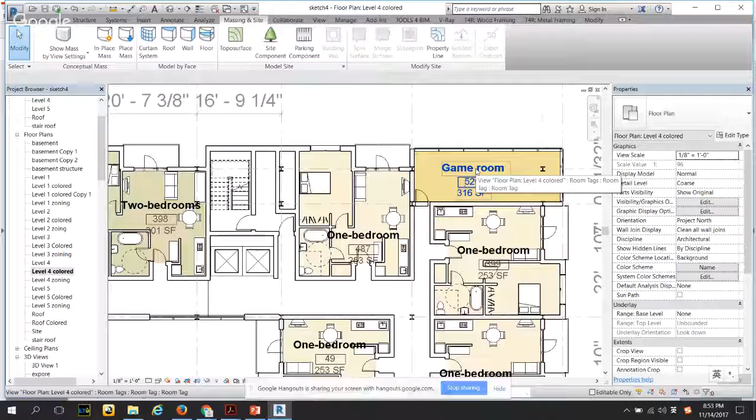So what else? Oh, here. So I have the extra space for the residential plan here, and I put the game room here because I don't want this to become a dead end corner. Gotcha. Yeah, but call it an amenity space. Amenity space. Can you spell it? Yeah, I'll type it for you. Okay. Where is my mouse? There it is. Oh, okay.

Can you go back to the floor plan a second? I wanted to look at that one end unit. Yes. Can you zoom out? Oh, okay. The one on the far left. Here? That dead end corridor there. How far is it from the stairway door? So what are you doing at the end of that corridor? What is that for? Right now, nothing, I guess.

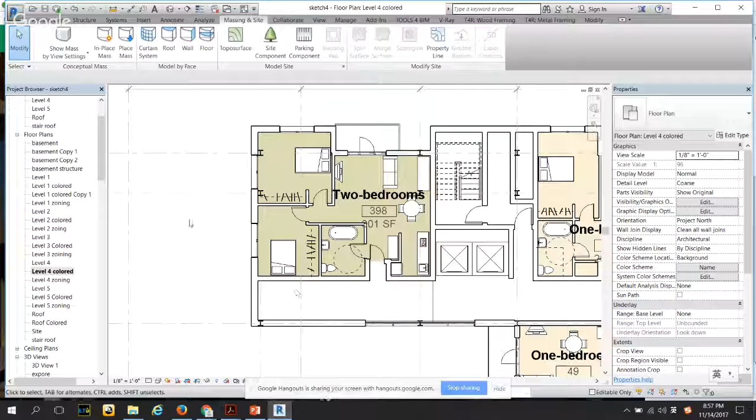Case closed, right? Right. Architecture is easy. Right? So I would make that change. Yes. Do you have that anywhere else on the floor plan? What about at the other end? The other end is a stair. No, that's fine. That's good. I would make that change.

Sure. Yeah. So, but my point is, I just noticed something else. My point is that when you're doing these mixed use buildings, I want you to see that when you're doing your next project, okay? Sorry, you just broke up. I want you to see that as an opportunity on your next project, your next studio or your next job.

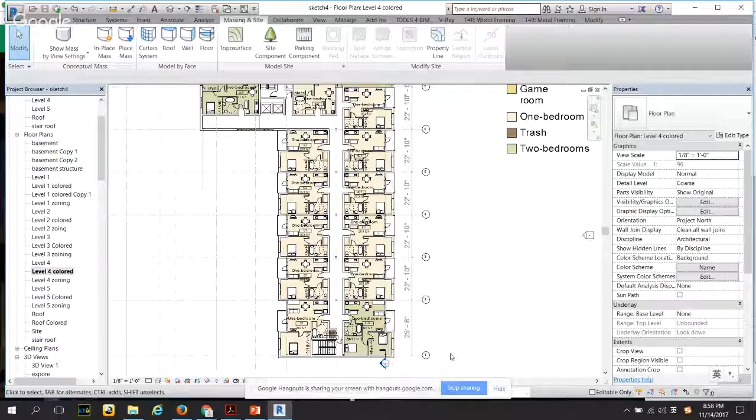Yeah, sure. Okay, now there's a column line in the middle of the hallway. What in the world's going on? So the hallway has eight... So before I had the dash line, do you remember that wall in the middle of the hallway to produce more privacy? I mean, it had the door. Yeah, I remember. But you're not doing that right now. Yes. Right.

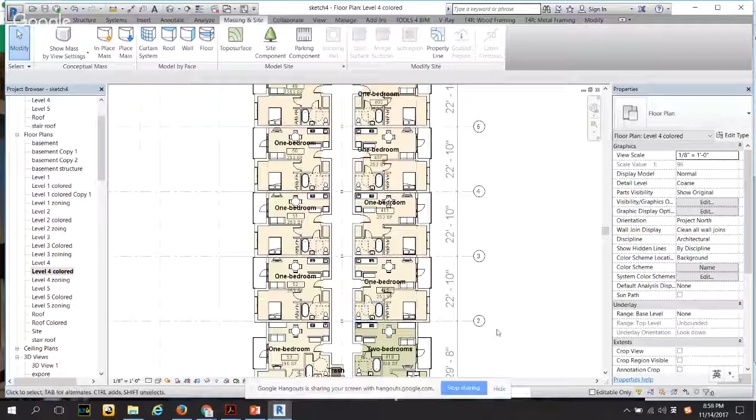So there's a column right in the middle of the hallway. Yes. You can't really do that. Bias that column one way or the other. Okay. It's impossible, right? Right. Now, what I just said is really important, but it's also going to create a headache for you as it translates to retail and to parking. So I'm afraid to ask if it's going to have a big impact down below. Maybe for the basement it's not very much. Okay. Well, I'm praying.

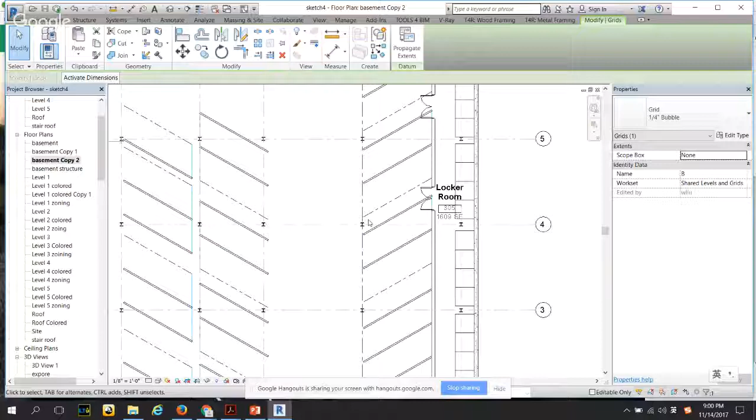So what column line is that? This line. Can you let me see the column bubble? Sure. Column B here. Can you zoom out? It's okay because I already saved the space between the columns. You froze up and I missed all of that. Can you zoom out so I can see which column line it is? Okay, can you zoom in on the column bubble? Is it A? B. Go to the top. I need to see B. Can you go back to the floor plan? Yes.

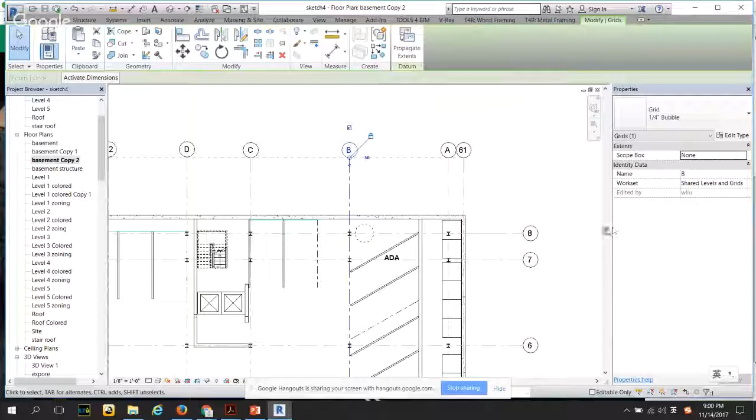So B needs to move to the east. Yes. Maybe 3 feet, so that the column is more or less like a pilaster on the corridor wall. Capiche? Okay, let's go back to the basement. When you do that, this move is really going to help you for the parking spaces, but you may need to recenter or respace some of them.

Also on that parking plan, those doors into the storage room need to swing into the storage. You there? Sorry. The doors into the locker room down there need to swing into the locker room because you won't be able to open them if a car is parked there. Right. Yes. Anything else? No, I guess. For now.

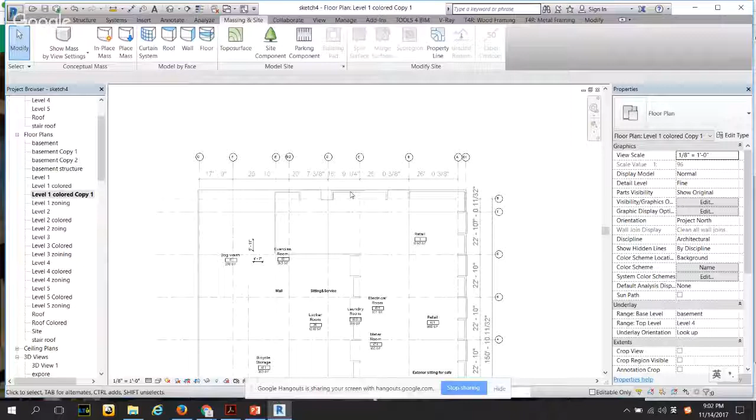What other options are you going to do? What options do you mean? In the program brief, I offered up several options. Which options are you going to do? I want to do the one from earlier, we had the lecture that night. Which one? The energy modeling. Yes. Right. That's a good one, and that's a high value proposition, right? That's a complex option. It'll take a little bit of work, but it will pay a lot of benefit to you.

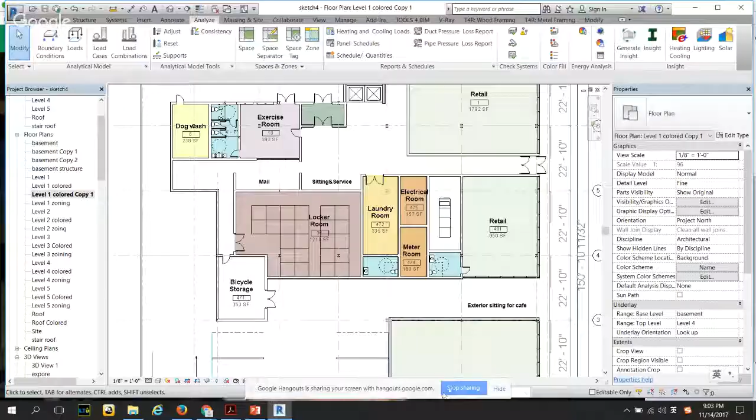Can you close your drawing? Yes. Okay, so I think that was a good choice. So for this week, I'm going to focus on the structure and the HVAC system, because if I finish the HVAC system, I can move on to the energy modeling. Yeah. A lot of work, but you know what? You're going to benefit from this design change. Right. Good. Anything else? That's all. Okay, good.